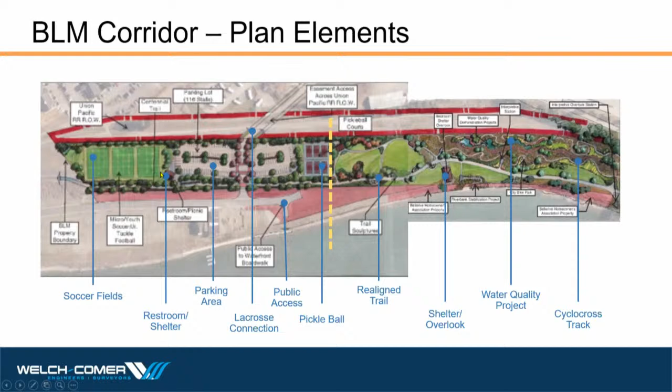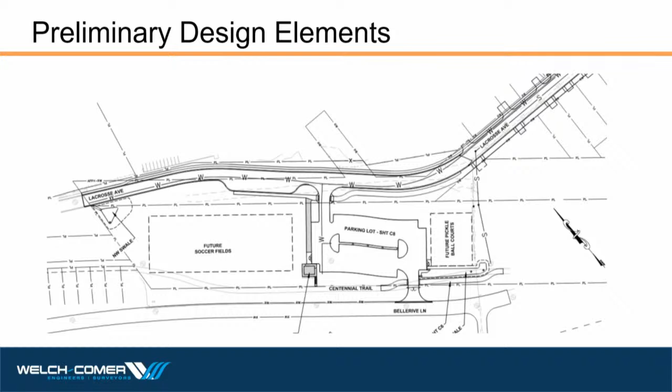So our project, we're in preliminary design right now. The plans are currently under review. We've got 4 or 5 primary elements that I think will make sense to you. One is Lacrosse itself, okay? And this is part of our base bid. In other words, if we're gonna award anything, we've got to award that.

And so Lacrosse is a 2-lane roadway, shared use asphalt path on the south or west side, a 5-foot concrete sidewalk on the other side of the roadway. There's 16 straight-in parking stalls up on Lacrosse. And I say up because Lacrosse will be slightly elevated to everything we're doing down below between the roadway and the Centennial Trail, just because of grades. And then what's slightly different from the master plan is Lacrosse was going to come down and just feed the parking lot. Now we have the opportunity, 6 years later, things have happened to create some connectivity and traffic circulation. So that's the roadway portion of it.

The other part of the base bid is that parking lot I mentioned. This is an 80-stall parking lot. We worked pretty closely with Bill Greenwood on the number of stalls that he may think he needs for all the amenities down here. So these two items are the base bid.

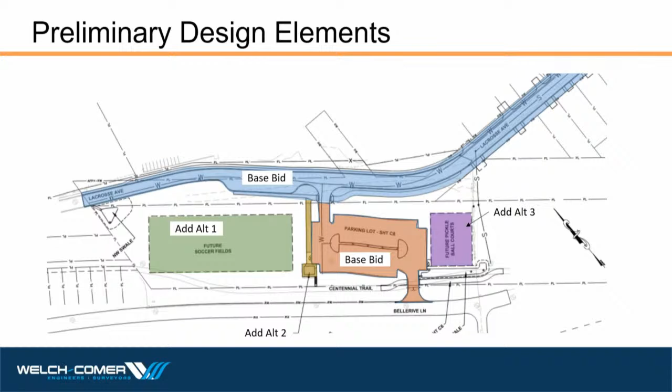BLM was a big part of the original master plan. A lot of this is their property, so we need to honor their desires. We took a close look at the beginning of this to make sure we're at least honoring the spirit of the master plan, and we think we are.

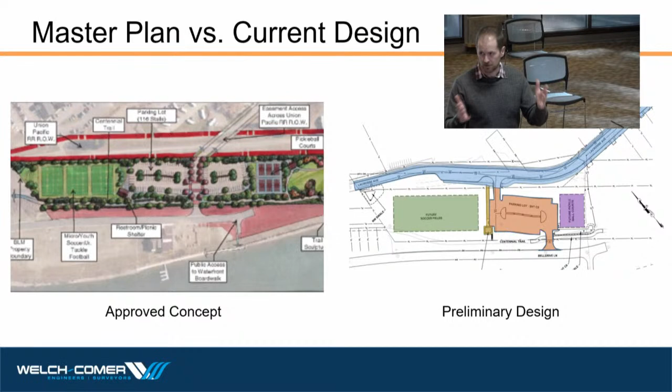We've got all the amenities - the roadway, the future soccer fields, the pickleball courts, and the parking area and bathroom. To verify that, we sat down and video chatted with staff from BLM and laid out everything, just like I'm doing now, just to make sure they understood the project and were supportive of it, and they are.

I think there's one small issue. We're trading information back and forth, and that just has to do with utilities crossing the BLM corridor. But since we've proposed the bathroom here, we have to service it, and to do that we need to get utilities across. So I think we're going to be fine there.

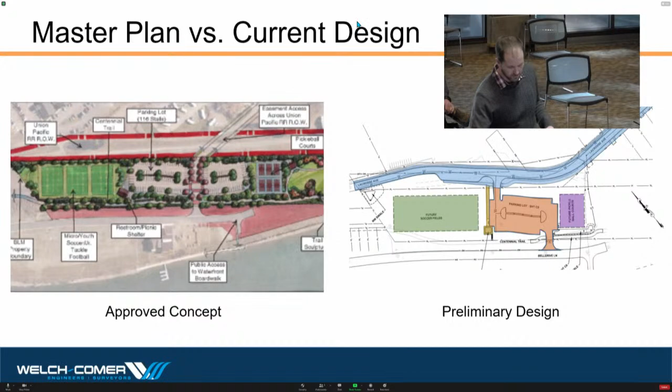As part of our roadway project, we have a lot of material to get rid of. Just the way the grades work, since we're trying to tie the roadway Lacrosse with Bellerive with a parking area, there's fire truck requirements and grade requirements we have to adhere to. So it's creating some excavation on the project, which is normal, but it's a fair amount.

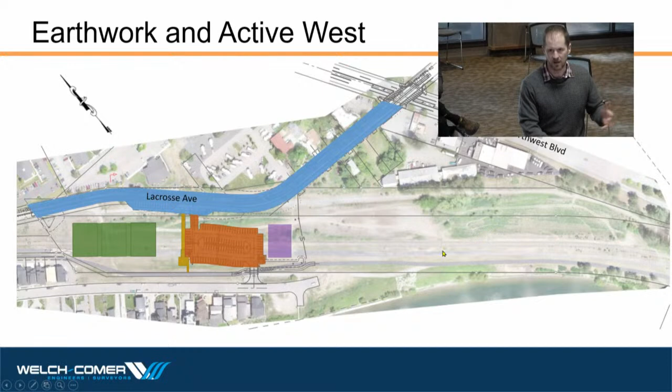So we have a few options on how we deal with that. One, the most expensive option, is we could excavate it and haul it off site. That's pretty expensive. Two, we could excavate it and spread it around here in some strategic manner, not in giant piles, in preparation for future park expansion.

That's also expensive. Or we could coordinate with the adjacent property owner, in this case Active West. So I sat down with Dennis Cunningham from Active West and talked about a mutually beneficial agreement here, because if you've been out there, most of this property is pretty low, it's in a big hole, a bit of a ravine.

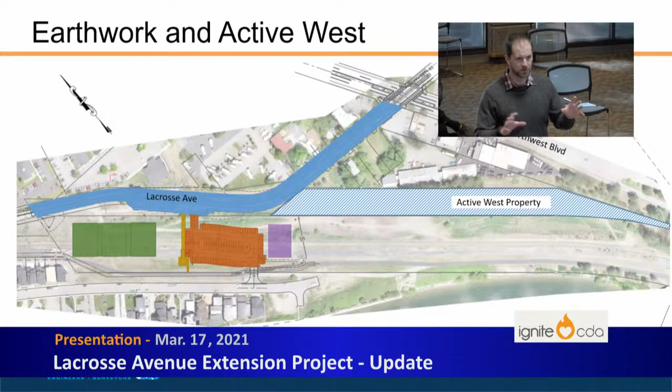And if this is ever marketable, there's a substantial amount of material that needs to be brought in to make it work. So there's an agreement we're working on right now. We've passed it back and forth a few times, but currently in general terms we have about 5,500 yards of material that we need to get rid of somehow, some way.

His site needs 6,000 or 6,500 yards of material. So instead of us paying to excavate it and get rid of it somehow, the agreement says that Active West will pay our entire excavation for the roadway, and they will also pay for the material they're taking. So the way I like to think about it is Active West is going to pay to stick the shovel in the ground and throw it on his property.

That's the act of doing that, and then also the material that's in the shovel - it's kind of a royalty. The reason, well, it's obvious why it's beneficial to our project, because we push a cost that benefits us to somebody else.

But for Dennis to make his project work, he would have to import it from somewhere, which is pretty expensive. So we're able to provide that at just barely under what he would have to pay otherwise, and so it benefits both parties. The other part of the agreement with Mr. Cunningham and Active West is originally we are trying to serve these commercial lots with sewer. They're currently on septic.

The original plan was we'll just build a sewer line here and drain it down to Northwest Boulevard, to that main, and off we go. Everybody's happy. The challenge is there's a grade problem, so we can serve maybe 3 of these parcels, but not the ones back here, and especially not the RV park, who really desires a sewer hookup right now. Not to mention the Active West property couldn't be served in the future either.

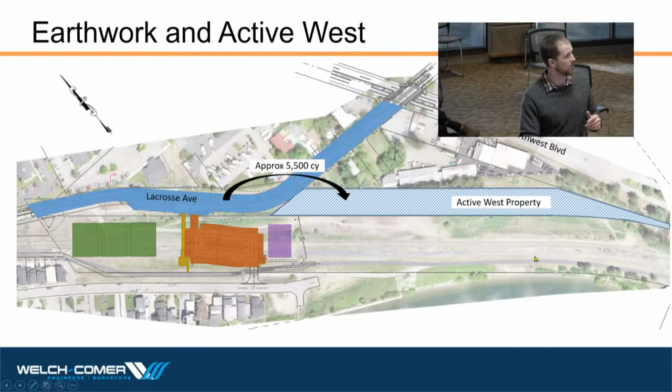Matt, just a quick question - is that BLM land you're going across there, though? This is BLM right here. So do you have an easement to go across that? That's what I mentioned, we're working on one. That's it right there, yes.

So the benefit to the city is we get to serve all of these parcels, right? The benefit to Active West, they get service, but the distinction is from this point all the way to the sewer interceptor is at Active West's cost. So it's a small savings to the city, but a big benefit to the city for sewer service.

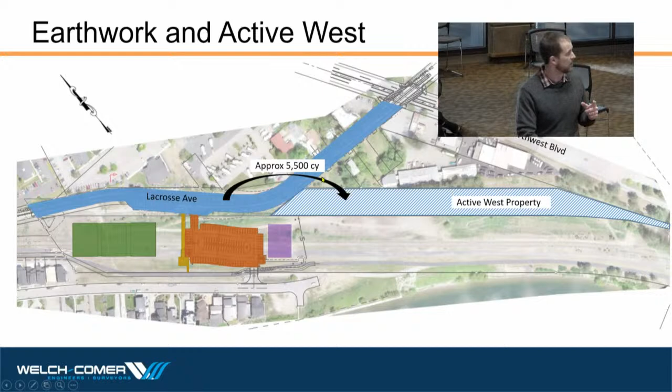The other part of the excavation is, depending on the bids and which alternates we're able to award, that will change how much material our site generates. So just like Lacrosse generates material, this area generates material as well.

The reason I'm separating them is because one of BLM's biggest concerns and requirements was you can't take any of our material and put it on some other parcel. Anything that is scooped out of our property needs to be on our property somewhere else. And we've honored that. So depending on what happens and which of these we're able to award, there will be some extra material that will be placed in this area.

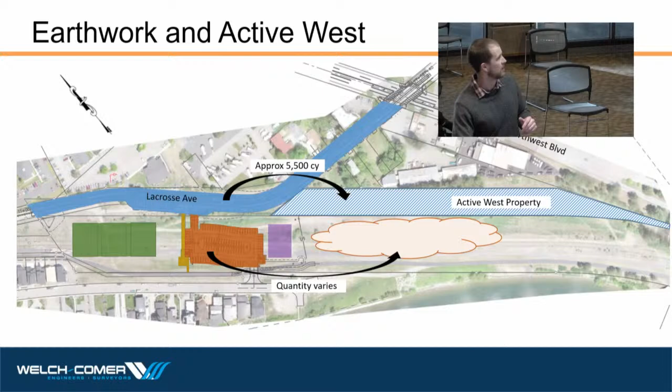But the quantity will vary. What's the worst case quantity, or the most, I guess? The worst case, the most - we're at preliminary right now, so I think we're at probably another 5,000 yards right in there somewhere. And the reason is, imagine these big flat fields - if you move them up or down a foot, it changes things quite a bit.

And is BLM okay with that excess material on their land? Yes, yes, provided we're not dumping it just in a big pile. So we're going to spread it out and make it mean something.

From a money standpoint, I wonder if I can move this. So on the left is our overall project budget. Currently, Ignite has committed $1.8 million. Active West, that agreement right now, if signed, will be $170,000. In full disclosure, some of that is the sewer line that'll be on his property, which he would have had to do anyways - that's about $40,000. But $130,000 of it is funding that's just infused into our project.

Then the balance of the sewer that isn't paid by Active West will be funded by the sewer department, which was confirmed today, and the water line, which I failed to mention, my apologies, will be funded by the water department, and will extend from about here through Lacrosse all the way to connect into an existing water line here. So we'll create some looping there, which makes Terry Pickel very happy. And then we'll provide a service into the site for the bathroom and irrigation, then probably another service for future whatever happens out here.

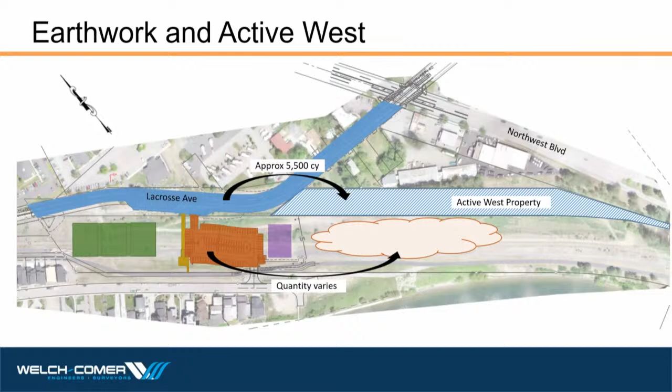We're pretty confident that we'll be able to award that, and this number has a 10 or 15% contingency even yet, so fairly confident we can award the base bid. Alternate 1, we're still slightly under budget by about $10,000, and remember, Alternate 1 was to grade the soccer fields. But once we get beyond that, we're slightly over budget. If bids come in right on the engineer's estimate, which they won't, we'll have a different conversation when we do open the bids.

From a schedule standpoint, the plans are under city review right now, the preliminary design. We're working, even while they're doing that review, to get those back soon with the intent to advertise at the end of April, beginning of May, with a summer construction, because there are some limitations on when this money needs to be spent.

That is all I have. Happy to answer any questions. Thanks, Matt. You're welcome. Yeah, thank you.

Does this include the signal, the new signal that would go in at Lacrosse? Yes, sir, it does. Includes the signal at Northwest Boulevard in Lacrosse.

Are you seeking grant funding for the remainder of this, or how are you guys planning on the additional costs for the ad alternates? Currently, we are at the funding limit that we think we'll get, at just under 2.2 million. That's where we're at now. If there's other opportunities, we're certainly open to them.

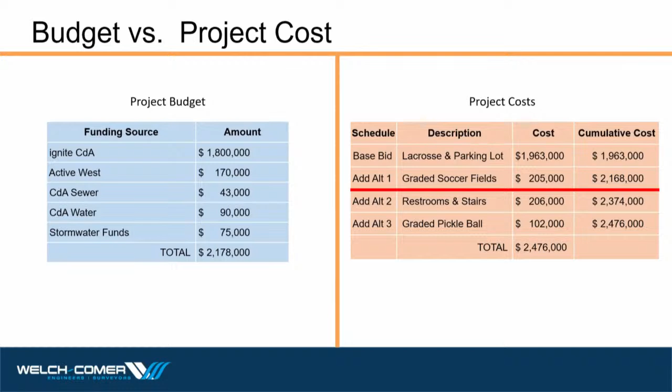Do you have the cost for the ad alternates in finished form and not roughed-in form? I do. I don't remember the soccer field, but surprisingly, the pickleball court, just to go from the dirt pad to a finished product, which means all the concrete, all the fancy marks, and then the fencing around, and then some sidewalk around, the landscape architect quoted me about $130,000, which is a lot.

Any other questions? Okay, well, thank you. Matt? So Matt, you'll be back to give us the final numbers when the bids are accepted? Yes, sir. Okay, yes, thank you. Next up, Commissioner Chapkus for the parking report, please.

Thank you, Chairman Hoskins. Well, we're seeing traffic and parking demand pick up downtown almost across all parking lot locations. Here are some of the numbers. February saw McEuen sell 208 passes. Total revenue was $5,225, lower by $345 from last year.

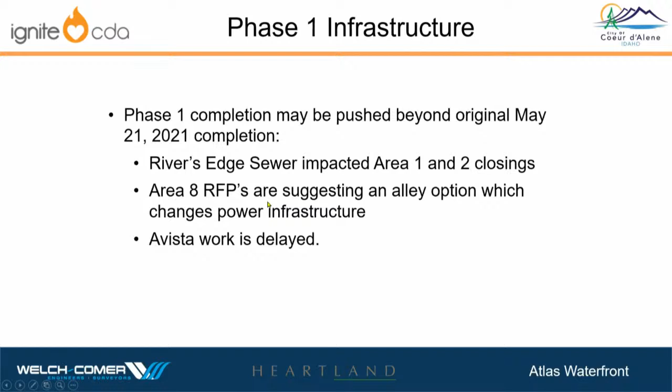Area 8, which is out to RFP right now—interestingly, the board might remember we had two different scenarios for that. One was single-family lots, the other was front-loaded single-family lots, so the driveways came off the street into your home. The other scenario we developed was alley-loaded lots. When we were platting Areas 1, 2, 10, 12, 6, and 13, we had to make a decision: are we going to put in alley-loaded lots, which I think, as you guys have maybe heard, are considered pretty progressive in Coeur d'Alene, even though we've got a town full of them. But down in this area we had some challenges with them, so it was elected to plat them as single-family front-loaded lots. The RFP goes out, and one of the first questions we get is, hey, can we do them as alley-loaded lots, from one of the potential proposal developers on the project?

So we talked it through with Tony, and we figured out a way to pause the construction in that area, to give the opportunity for the RFPs to come in, because we wanted to give the selection committee and the board the latitude to look at both the product that might go in there and the pricing for that product, because potentially the pricing for that product type could be higher than front-loaded single-family.

So we've paused construction in that area primarily related to power, and Avista is just generally delayed. If you go out and look at the site now, you'll see trenches all over the place as Avista installs their conduits. Gas crews haven't been out there in quite a while, so they've got a lot going on their end. We're open and ready for them, but they haven't been able to get to the site. Once they're complete, we'll close in their trenches and move forward with the rest of the infrastructure.

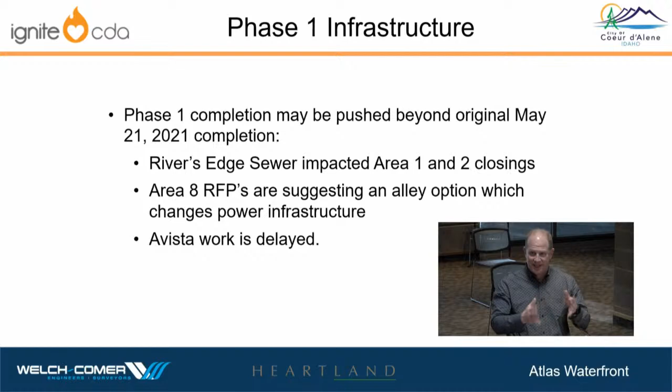The overall impact to Ignite and the developers - we don't see a lot of impact if the date gets pushed out. There is a potential cost impact if we miss our paving window, but we're not exactly certain of that. We're going to try to hit the paving window really hard, because under the current market, everyone wants the paving companies to come do their subdivision. So currently La Riviere has a date on their dance card, and we're going to work hard to maintain that date so it doesn't get pushed off further.

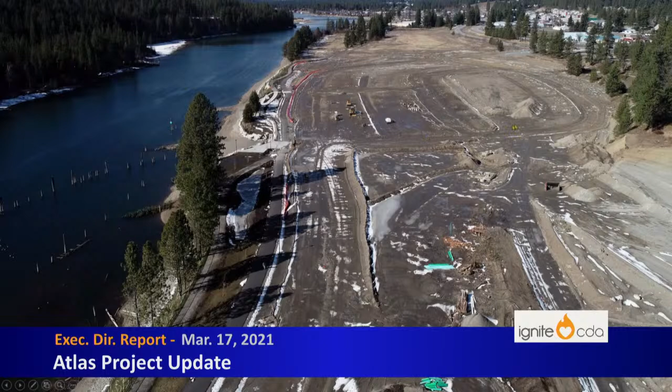Just got a couple of photos. We shot these in March, so there was still snow on the ground, quite a bit of moisture in it. But you can see here it's starting to shape up, where you see Atlas Road that comes off of the roundabout.

Here's Area 8, and this is Area 1. This is the alley here through Area 1 and Area 2, so you can see how it's starting to shape up in there. Currently there isn't any work east of this that you can see, because we intend to probably borrow quite a bit of soil in this area.

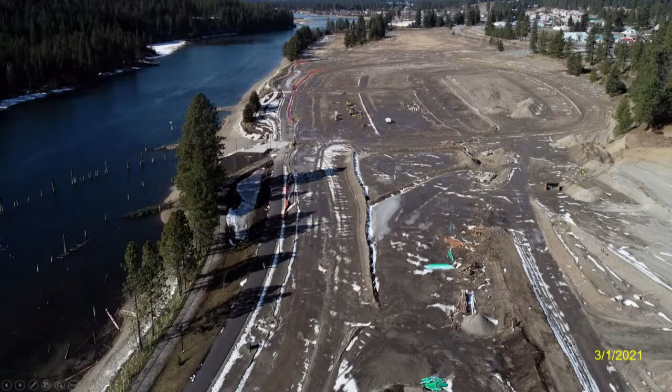Photograph looking - here's the maintenance, parks maintenance and storage building, the restroom facility, and you can see the big, what will be great big green spaces in here. Quite a bit of water in this swale here because the ground's frozen.

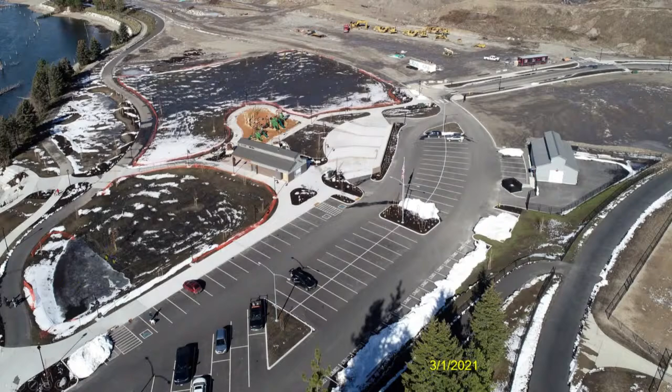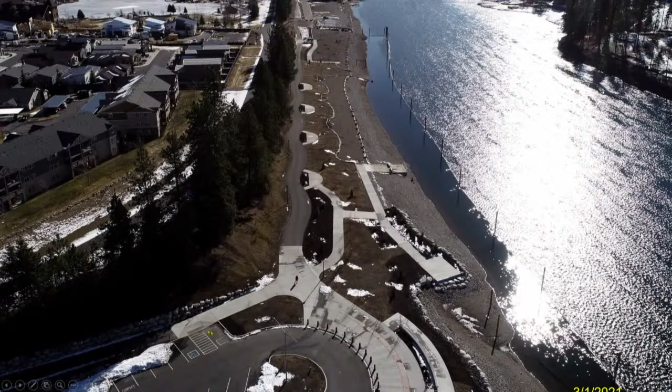Another shot looking back to the east, and you can see how the grass is starting to peek through right there. The water is so low you can really get an eye of what the ADA swim launch looks like here. I've got another shot of it I'll show you, but this is the accessible route, the accessible picnic area, and if you come out of these accessible parking spaces down here, you've got a route right down to the water.

Another shot looking back towards the south. And here's another good shot - you can see this is what's called Veneer Road. And then here's another road here in the alleys on Atlas Road.

At the last board meeting, I talked to the board about, and the board approved, funding for a shared use path on Area 12, potentially also on the River's Edge property. By doing that, we're able to put the diagonal parking spaces down in this area, which we're still headed toward and kind of working through that process. Hopefully it will come to fruition.

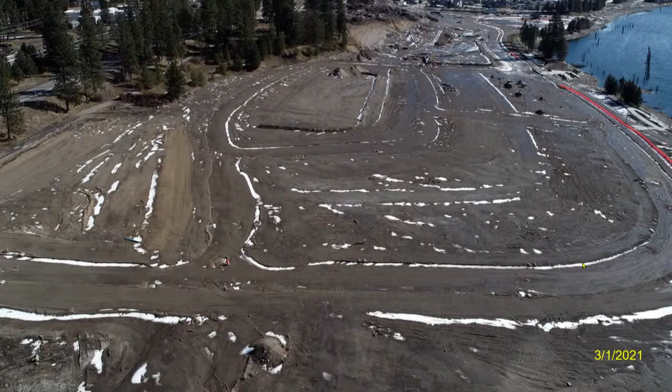This is a shot back at the shoreline here - you can see the rock wall, the water is quite low there. This is another shot, this is what we call the inlet, kind of a bigger beach area in here. The water, when it's at full pool or summer pool, is kind of right in here.

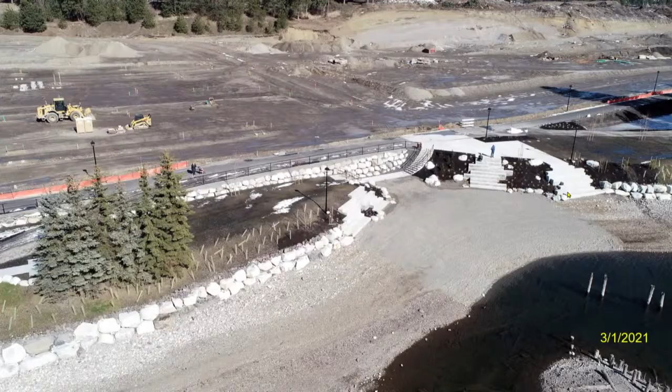Another shot at what we call the amphitheater, for obvious reasons. This is the ADA launch - you guys have seen that before. And then there's the swim launch, which people use. I was down there the other day with the dogs, and it's interesting - people sit down here and just hang out this time of year in the sunshine on those transfer walls.

Any questions on phase one before I move on?

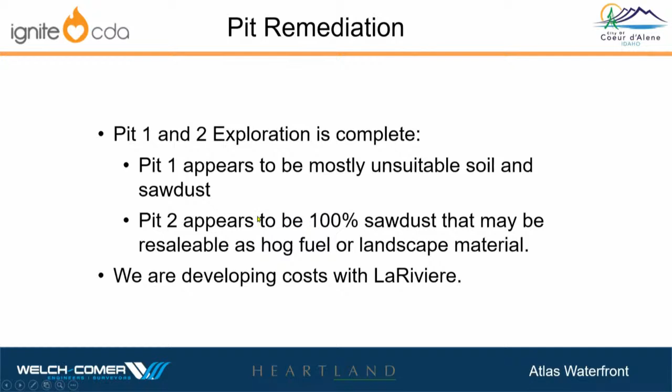So pit 1 and 2 exploration - I've briefed the board on that before about getting out there, digging big trenches across it to try to get a better idea of what's in there. Pit 1 appears to be mostly unsuitable soil and sawdust, which was discouraging. We were hoping there was going to be something in there. When I say unsuitable, I'm primarily focusing on the structural nature of it. We can generate topsoil from it, but we don't need topsoil, we need structural soil. We can generate topsoil and sell it over time, but we really wanted structural soil. Pit 2 appears to be 100% sawdust.

So currently we have LaRiviere looking for an opportunity to resell it as hog fuel in the fall when the mills need it, or potentially as landscape material. That's one of the things we'll work through, getting the pricing, and bring it back to the board once we develop an overall cost structure with LaRiviere.

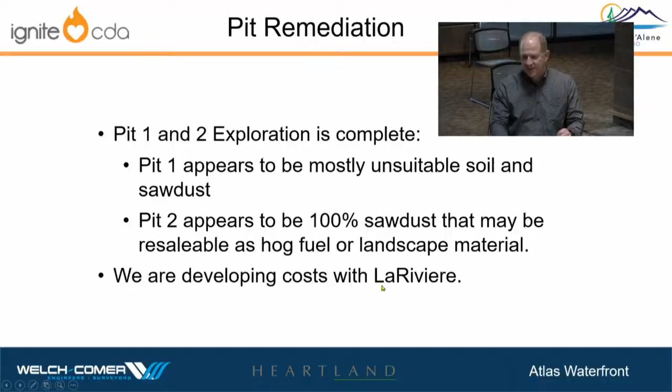What we plan to do is level off Mount Hink, and in the process of leveling it off, evaluate if any of that material is suitable. As we start pushing it around, we'll get an idea. If it's suitable, we'll segregate it and process it to generate structural soils and topsoil. So we'll level that all off.

Once that's leveled off, we now have a stockpile area set. Because as I've mentioned before, we're in for the long haul - 2, 3, or 4 years in the pit remediation business. So now we've got a stockpile site.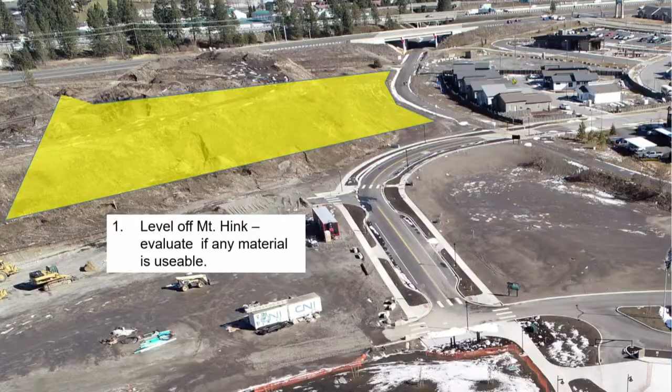Then we go and excavate pit 1. We'll round it off to 100,000 yards of material out of here, and we bring it over and stockpile it on our Mount Hink flat spot. As we bring it out of the hole, we're also classifying it - saying terrible, never going to be able to use any of it, let's stack it over here; not so bad, we'll be able to separate it into topsoil, maybe some structural soils, we'll separate it over here. All the while, we're getting a good idea of how much material can go back into Mount Hink.

So we've processed pit one. We've figured out what is structural out of Mount Hink, and what's structural out of pit one, and now we've put that back into pit one. So we started with a 100,000 cubic yard hole, and maybe we put 20,000 yards back into that hole. So we're still 80,000 yards short - I need to get the 80,000 yards from somewhere.

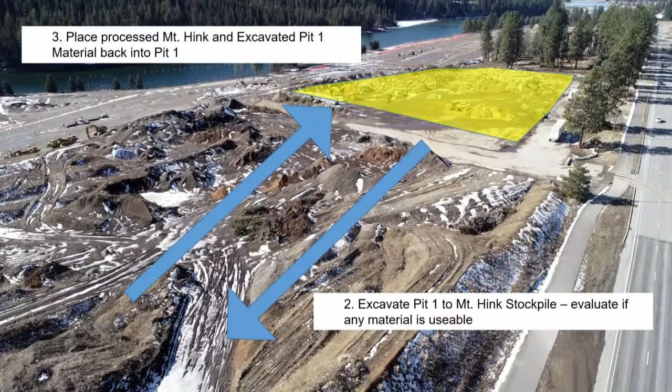Well, this is the 80,000 yard location. The reason that information is so critical - to analyze what I need, how much we're short, before we design this - is because obviously you can imagine the impact if we lower that whole site substantially. Removing the trees has always kind of been in the cards to do work in there, but exactly how we leave those depends on this.

The way to think about it: on the lots on the edge, if you envision a flat lot that doesn't require a daylight basement, that's if I only need 80,000 yards. If we need more than 80,000 yards, we'll end up with a sloped lot that would require a daylight basement, which isn't the end of the world. We don't anticipate it affecting lot sales, but it's one of the considerations I wanted the board to be aware of, that we may need that material.

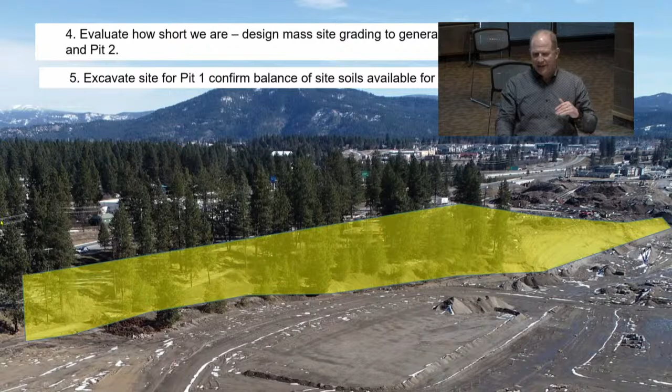As we excavate this material, we'll put it into pit one, and then we'll stockpile probably for pit two. The thinking behind this incremental approach is to never get ourselves too far extended financially, and that we're always producing resaleable land with the minimal amount of investment up front. So that's the current plan of action on the pit remediation.

Glad to answer any questions on that. Bill, are all those trees gonna come up? Yeah, probably most of them will. Yeah.

The ones on Seltice Way that are closest to Seltice Way, we're working to try to figure out how to save those if possible, but some of that depends on how much site work we have to do through there. That's also why I want to wait to know exactly how much soil we need to remediate in pit one. If there are opportunities to save some of the trees through clever grading, we would do that.

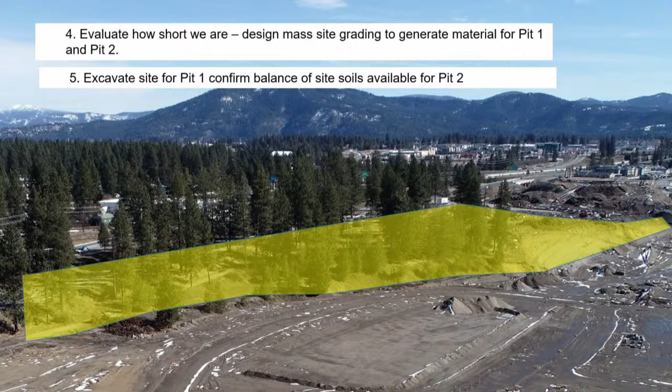If the board remembers, there's a hill climb that runs right through the site here, pedestrian access that runs from Seltice Way all the way down to the waterfront. Maybe there's some opportunities to save something in there. I just don't want to get carried away with site grading until I really know what we need.

So the next action item for the board to consider is raised intersections or speed tables on Atlas Road.

When we originally conceived of the project, primarily Matt Gillis's group of transportation engineers, were worried about the speed of vehicles through here. It was always in the back of our mind at the concepting level, this kind of worries me a little bit about the speed of vehicles coming off of Seltice Way. They're at pretty good speed. They come through the roundabout, slow down a little bit, but then come down a pretty steep grade right here, about 7.5%. So you're coming down a relatively steep grade, you hit this corner, get around it, and then you're like, sweet, a nice straight stretch, so you take off through it.

During the financial feasibility part of this, when we were crunching numbers and making sure it would work financially, we were pulling out things that are really nice to have and that we think are important, but sometimes some things just have to be sacrificed. Well, the speed tables were one of them.

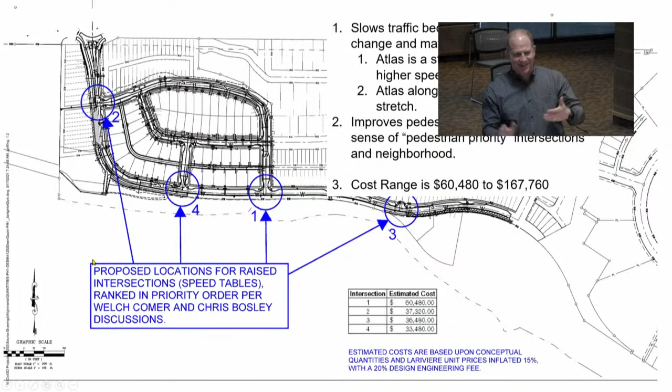As we got into the design level detail, Matt's group of transportation engineers got even more concerned, and they kept saying this is worrisome. They called Chris Bosley, the city engineer, and he's also worried about it, just from the standpoint that this is supposed to be a pedestrian focused neighborhood. So between our shop and Chris, we developed a priority list of potential areas to put in raised intersections. This intersection would be priority 1, priority 2 up here, and then 3 and 4.

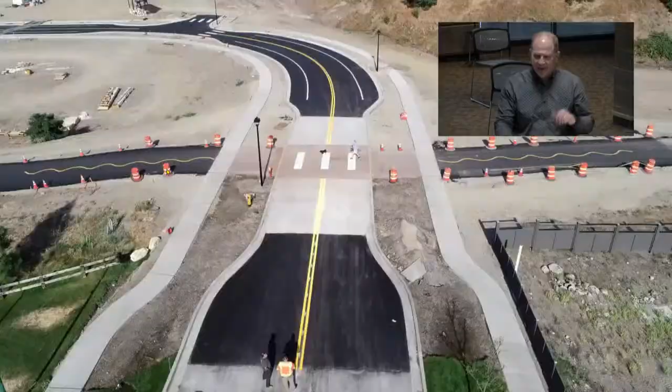I think you guys are all familiar with what raised intersections look like. This is the one that's at Suzanne. This is the prairie trail that moves through here, crossing Suzanne, headed into the park. Again, it's kind of the signal, what's going on here? Why is there a color change? Why is there concrete suddenly? Why does it narrow?

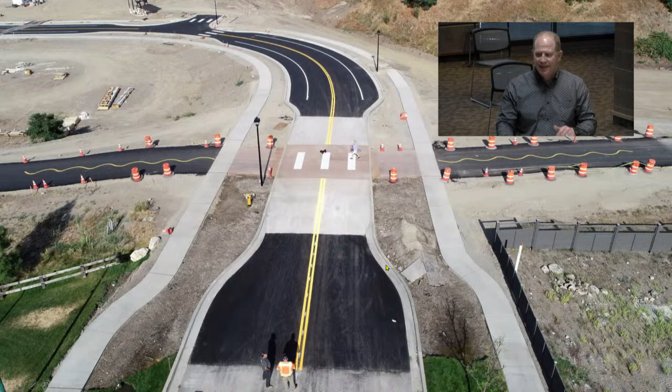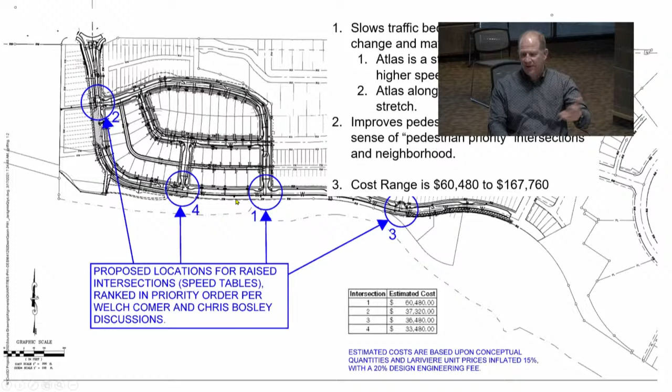The range of costs starts at 60,000, which would be priority one, to 167,000 if the board were to fund all of them. So the question in front of the board today is whether that's something you want to pursue, implementing and funding, because it's not in our current budget. Tony and I had this discussion that anything that wasn't in our original conceptual budget, and you guys know the cash flow, we went over the cash flow with the finance committee last week, anything that wasn't in that we're bringing forward, like the shared use path last month that was never in the budget, so we brought it forward. This was never in the budget, so we're bringing it forward for the board's consideration.

Bill, I have a question. This is Brennan. Hi, Brennan. Are there any other traffic calming measures? Number one is that straightaway, so I see why that would be prioritized. Number two is steep, but just from cost savings, are there other alternatives besides the raised paths that would calm traffic?

The ones that we would typically employ are the vertical elements, the landscaping elements at the intersections, we're employing those. So Del Hatch's landscape architecture at the intersections has the vertical elements, the trees, the landscaping, the shrubbery, which again is a signal to say, hey, I'm somewhere that I probably shouldn't go fast.

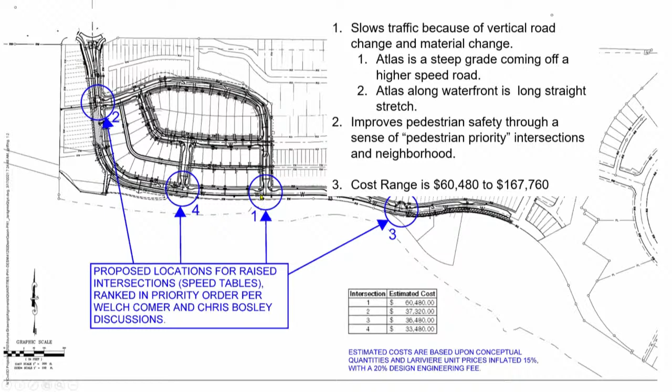I guess it's a moot point if we decided to fund all 4 anyways, but just saying. Well, I would make a motion that we do approve the funding for the 4 speed tables. I second. A motion and a second. Any further discussion?

All in favor, say aye. Aye. Aye. Aye. Opposed?

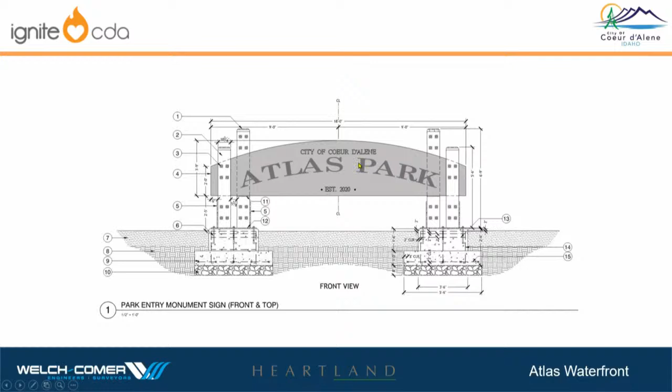In fact, we're showing them street signs at each of the intersections. I referred to this park sign, which is going down by the restroom shelter, talked about some of the elements, the vertical elements, the curved top to the sign itself, the font style that we're using, and we talked about incorporating that into this signage package as well.

I'll ask you to, for tonight at least, ignore the colors that are shown here because we're not at a color choosing spot yet, but this was the presentation that we reviewed in January, showing primarily concrete columns, adding a river rock base, these elements up above just to carry the weight, and the spans, as we're talking to our structural engineers, are becoming steel members. We talked about having posts and decorative fence that would at least, flanking these sign elements, buffer traffic noise and things like that.

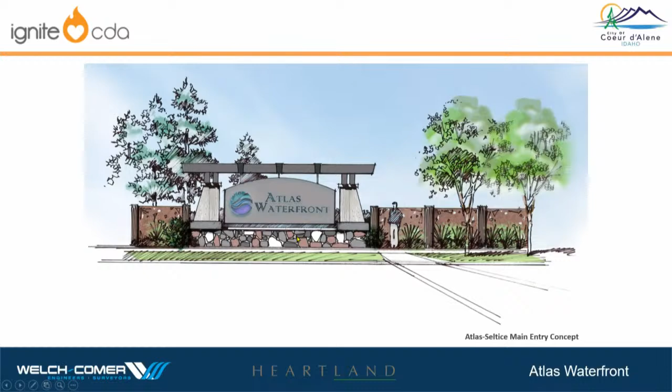This sign is at the roundabout, primarily on the east side of Atlas. This one would be a smaller component on the west side, also at Atlas. This is at Heartwood.

If you'll see this element, both of these elements, in fact, are essentially that same element. This one's scaled down in both height and width, obviously, from the first one.

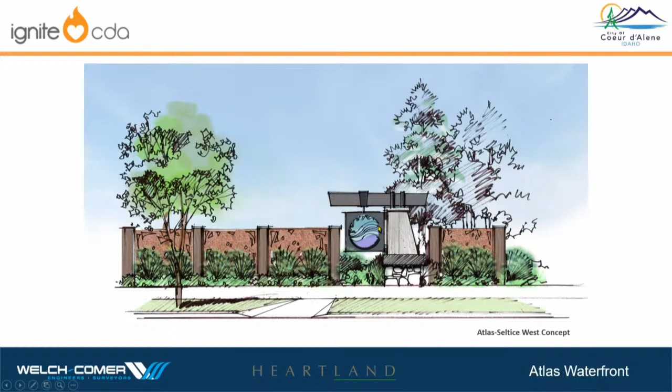This was the concept at Suzanne, and the thinking behind this one was that we're using all of the same components, but this one's up in the air. We're getting it up above walkers or bikers, and trying to move it back away from the road surface so that as people are moving on the trail or walking on the sidewalks, the people in vehicles can see them a little bit better.

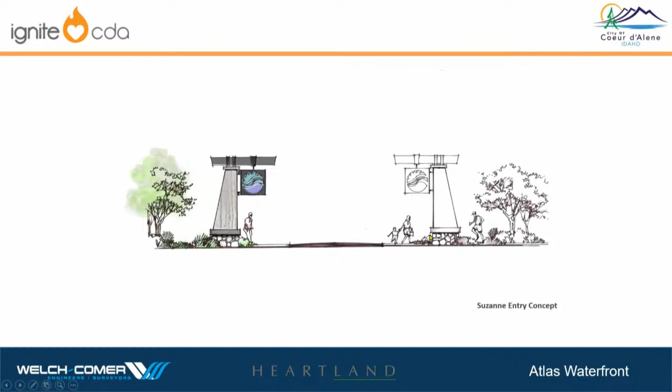This was one of the concepts we were thinking of as a street sign. It has adapted a little bit from this, and I'll explain it to you here in just a minute. So that was just a quick update.

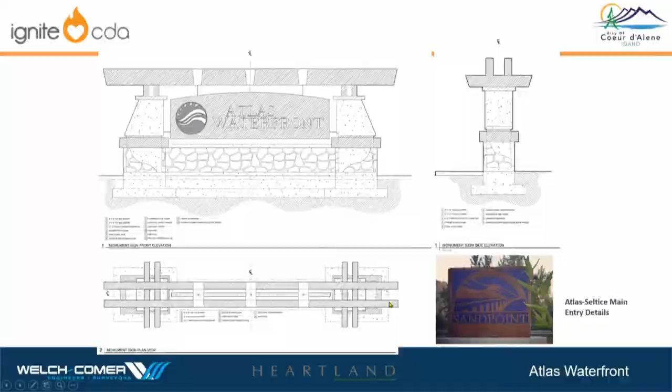Just to let you know, we took the dimensioning off of that earlier one just to make it a little bit more clear, but we've actually got these things proportioned, dimensioned, et cetera, and all of them are being vetted with our structural engineer right now. The details don't incorporate the rebar and stuff like that at this point, but obviously there's lots of rebar in these areas here and in through this wall that you see here.

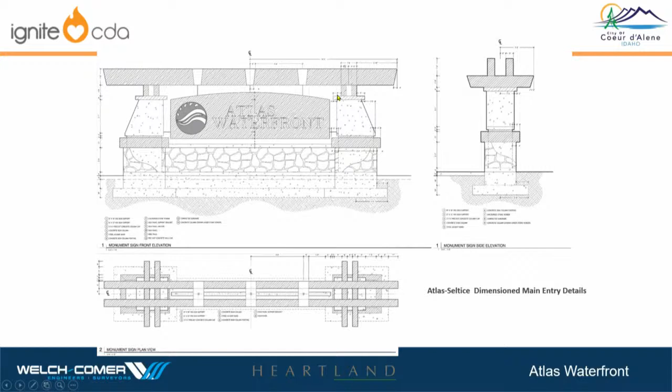We're also in some pretty detailed discussions about what those actual connections look like, how they're achieved, primarily through bolt connections on top, et cetera. Right now we're envisioning that this entire element, with the two cross pieces there and the two cross pieces there, would actually all be set in one piece—obviously needs something like a crane to do that. The span, just to give you an idea of proportion, is about 21 plus feet from here to here. The height from the very top is close to 9.5 to 10 feet.

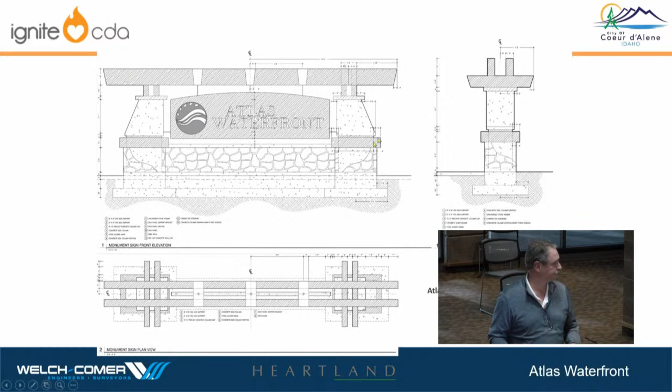As I move through these others, realize that they also have been dimensioned out and such; we're just not showing that right now. This is the smaller element that would be on the west side of the roundabout—almost all similar construction through there, scaled down slightly, but otherwise detailed pretty much the same, this being more of a cantilevered setup.

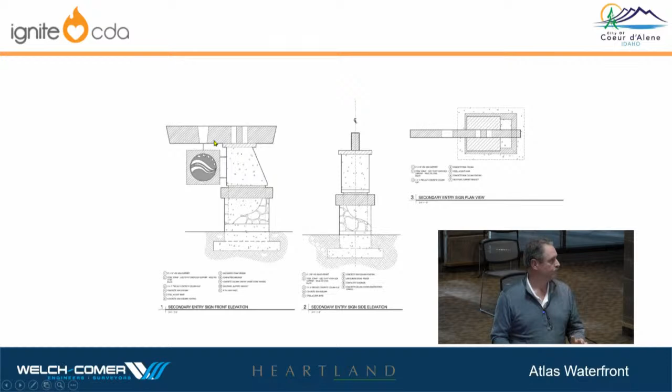Here's the one at Suzanne.

This one's coming along, but we're still playing a little bit with this width. It feels a little squatty and broad to us. We're looking right now at narrowing this angle a little bit, maybe narrowing that base up. Those are conversations we're having with our structural engineer. What he's also suggesting is that rather than trying to cantilever this all the way over, there may actually be an internal steel post there that would go all the way down into the footing.

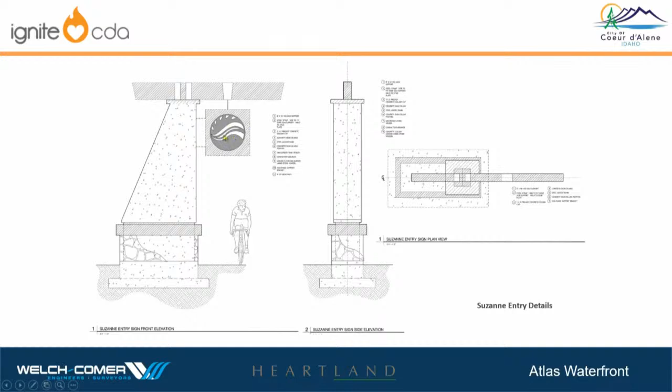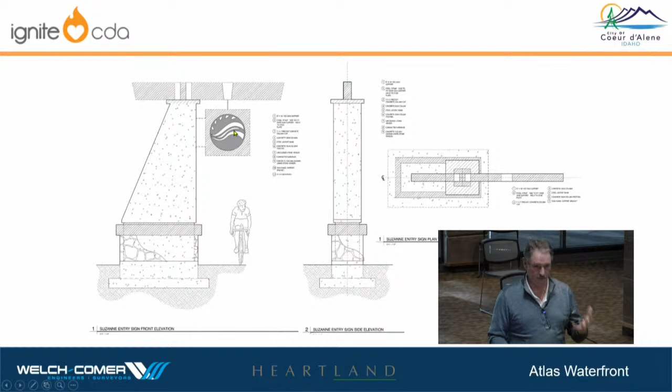Side view, top view. Again, we're hoping that these signs as well could be essentially a boxed metal, in these cases viewed from both sides. And on the big one, only viewed from the Atlas and the roundabout side. But these would be viewed from both sides, again, internally lit, and at a height that is not going to interfere with bikers or walkers or things like that.

This element is much taller, actually, than our main large sign at the roundabout. This one is closer in height at the very top to 14 feet.

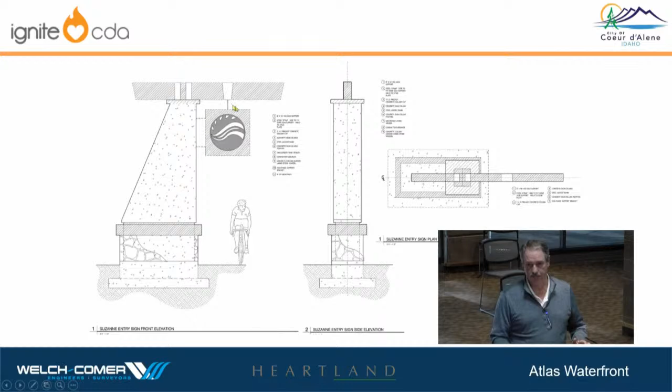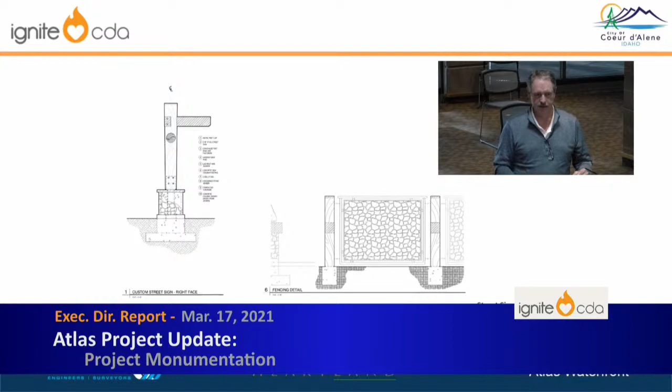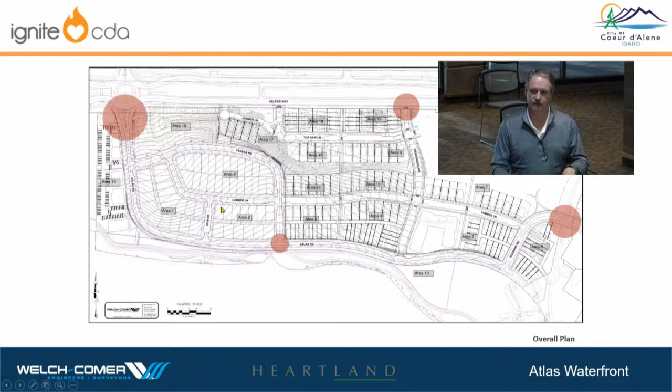On these, where they eventually are planned to move through, and on this intersection, we've actually got them placed on one corner of that intersection.

The other thing that we're looking at doing, I mentioned, and in the sketch it's a little bit different in the concept sketches, flanking these entry monuments, we'll call them. We had suggested that there would be a certain distance of these screen panels that would draw you in to these entryways. What we're looking at now, for both efficiency and durability, is the posts to actually be concrete, board-formed and then stained so that they can appear as wood. And then the panels themselves would be a decorative metal cutout that could be powder coated to match the rest of the theme, to complement the rest of the signs. So not solid, and in fact somewhat transparent, but enough there that it sort of blocks visually and buffers visually both the property development that might be on the development side of the sign, and from that property sort of visually buffer the traffic side.

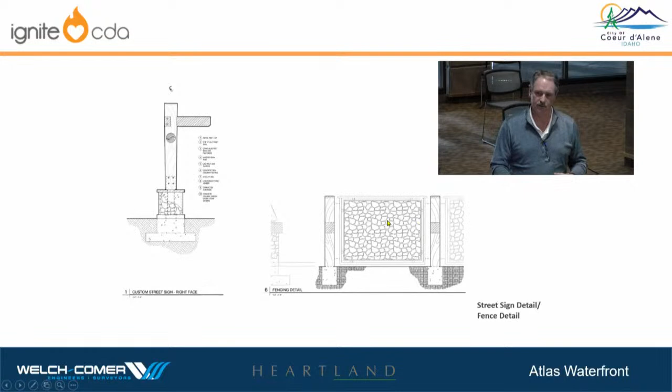You can see that the one we're considering now actually almost kind of picks up on that river rock cobble look that is integrated into the base of each of these signs.

I think that's it. What questions can I answer for you, and tell you where we're going from here, et cetera?

Mr. Chairman, I have a question. This may not be for Dale, this might be for Tony, but who pays for the long-term maintenance of all the monument signing and all the other signing? Is that part of the homeowner association? It's going to be the master association.

Any other questions or comments? Looking good, okay, thank you. Dale? Thank you, Dale. That's all I have, Mr. Chairman, for my report.

It's an action item for what? Well, it was listed as an action item in case something came up that needed board action. Okay, carry on. Any actions there that we think we need to take, other than Dale and team to continue? All right.